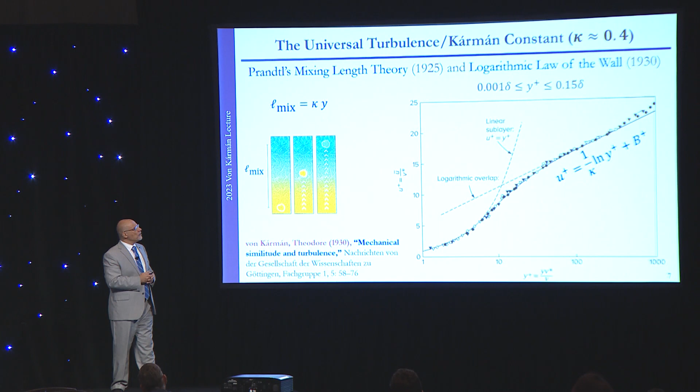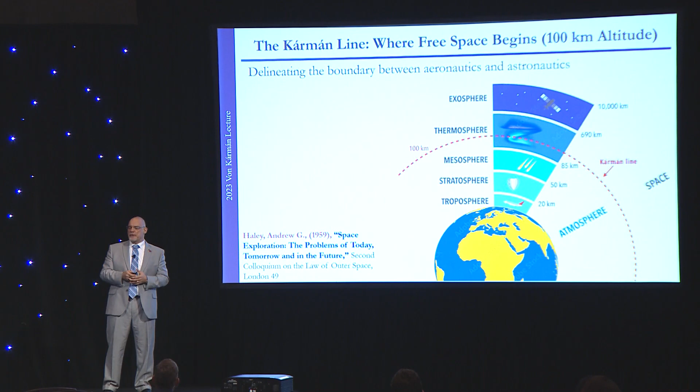Another well-known term that is used is the Kármán line, that is approximately about 100 kilometers, which delineates the beginning of free space or outer space, so the edge of the atmosphere, that is also named after Dr. von Kármán. Now, however, of all the publications that Dr. von Kármán had, if we do a search on the Web of Science, by far his most widely cited publication is his work on the momentum integral approach. That was a 1921 paper.

We on the board of the American Institute of Physics, and particularly Physics of Fluids, had a special collection to commemorate that study a couple of years ago, and we received a number of contributions all the way from Ohio State University to Stanford, showing that this approach is still being used today. And of course, the momentum integral approach is taught globally. You can find it in almost every textbook on fluid mechanics, both at the undergraduate and graduate level. I personally covered the entire theory last week at Auburn University in my Aero 3 course, which is on viscous aerodynamics.

Every senior has to take that at Auburn. But to put it in context, we have to go back through time to 1904 with Ludwig Prandtl and his seminal paper. It was only an 8-page paper, yet many considered it to be revolutionary in the sense that it laid out the framework for everything else to come.

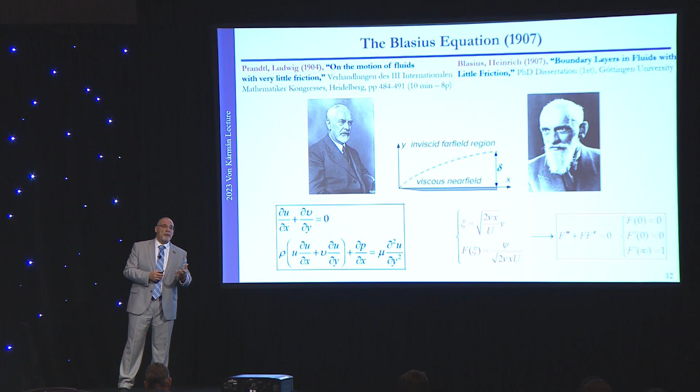It has been also used as a benchmark for both analytical results and in terms of testing new computational methods that seek to solve nonlinear problems. Now, let's talk about the 1921 paper, whose centennial we would like to celebrate today. It was published in the Journal of Applied Mathematics and Mechanics, ZAMM. That was at the time one of the most prestigious journals in the world. That's where von Mises published the laws of stresses.

And this paper really gave us a simple formulation for the shear stress connected to both capital U and little u. Capital U referred to the far field, and up to that point everyone knew how to capture the far field, and little u referred to the near field. That was the velocity profile within the thin viscous boundary layer that Prandtl had talked about a few years earlier. And it came as a response to the Blasius solution.

The Blasius solution was fantastic. It's referred to as an exact numerical transformation or reduction of the Navier-Stokes equations, but it's limited to flow over a flat plate, whereas the momentum integral formulation by von Kármán applied to both laminar and turbulent flows, and truly could be extended to arbitrary configurations. So it had no limitations such as those applied to the Blasius model.

And again, in order to solve it, one needs to know the far field, which was generally very well known, and also the near field, little u. And for that reason, Kármán's companion Pohlhausen, who had moved with him to TU Aachen, published a sequel. They were published back to back in ZAMM, in which he provided polynomial approximations that helped us to capture and model the velocity profile within that thin viscous boundary layer.

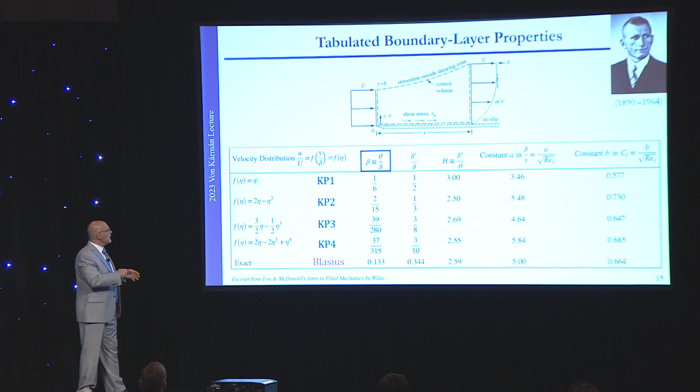Next, I'm going to look at how it's usually presented in various textbooks. This is a table taken from Fox and McDonald's Introduction to Fluid Mechanics, widely used. I did not want to use one from Frank White's book that I helped co-author. But this is one, actually, when I was a student, I ended up studying through using this table. And you notice here on one hand, we have the different polynomials, first all the way to fourth order, and the different constants that we look for.

Beta, for example, is the normalized momentum thickness. It's a very important parameter. It's a number that you can calculate for any given velocity profile. You can find beta. Also, we have a constant that we're going to refer to as A. This is really a constant that characterizes the boundary layer thickness. If we know A, we know the boundary layer thickness because there is a universal form for it, and that varies, of course. And there is another constant B, which gives us the skin friction coefficient.

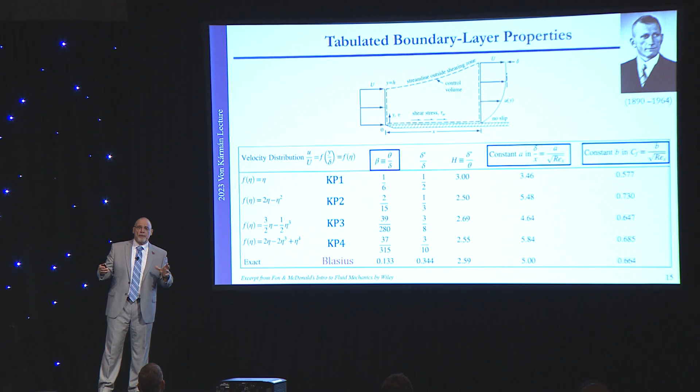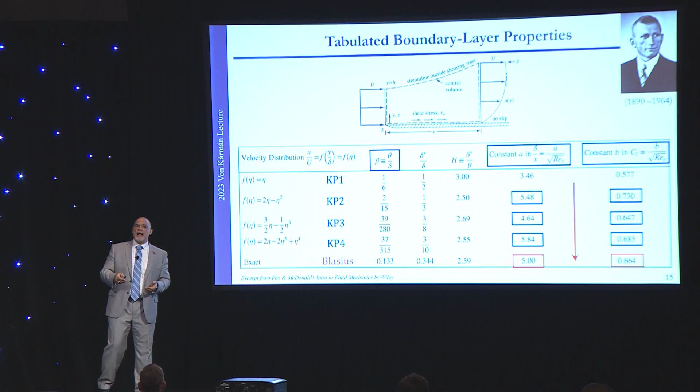Now, there are many other parameters, but I want to limit my discussion to only two because we have a limited time to cover here today. And one thing that was noted as we moved from the second order to the fourth order, the discrepancy between those values that we obtain and those predicted by the exact solution, the supposedly most accurate solution named after Blasius, actually the error increased. To show this more dramatically, I calculated the relative errors using any one of these polynomials, and let's take a look.

So as we move from the second order polynomial to the fourth order polynomial, the error increases from about 3% to 13%, and most significantly in modeling the boundary layer thickness, the error using the supposedly most accurate polynomial, the fourth order polynomial, becomes of the order of 17%, which for many of us is considered to be unacceptable. As a result, many have abandoned the use of the momentum integral approach, the Kármán-Pohlhausen, and adopted other techniques such as Walz and Thwaites that are also taught globally.

This problem really bothered me for many years. I've been in academia teaching for perhaps more than 30 years, and I've asked every faculty I've come across who teaches the subject from MIT to Stanford why this happens, and the only answer I would get, hey, this is part of the beauty of aerodynamics and fluid mechanics. They are full of paradoxes. But it really bothered me that when we go to a higher order polynomial that is supposed to capture more correct boundary conditions, the ability of that polynomial to agree with the exact solution deteriorates. That did not make sense to me, so I decided to investigate this.

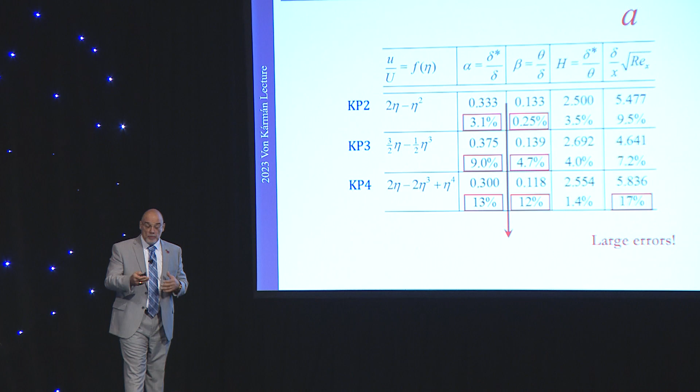And by the way, in order to find any one of these constants, A and B, for any given profile, one has to go through a set of algebraic operations, and these take a bit of time and effort. But throughout this type of effort, one can attempt to generalize. And the way I was able to reverse engineer this problem really happened while preparing for classes. I was able to come up with two constants, A and B. These are the same two constants we talked about, one being the boundary layer thickness, one being the skin friction coefficient, and find direct connections between the vorticity at the wall, which is also the slope of the polynomial, f naught prime, beta, which is the momentum thickness normalized, and A and B.

Those relations were so simple. If you multiply A and B, you get 2 f naught prime. If you divide B by A, you get beta. And then knowing how to connect the final answer all the way to the polynomial itself from its roots, it allowed me to reverse engineer the problem, and essentially take a deep dive into it and understand why different polynomials do not agree with the exact predictions. And to show this more clearly, I'm going to have some visuals.

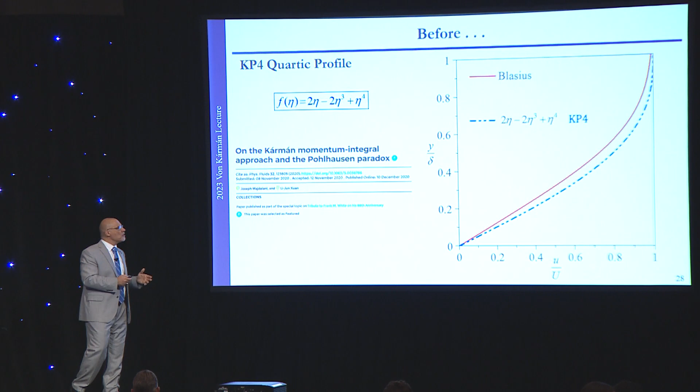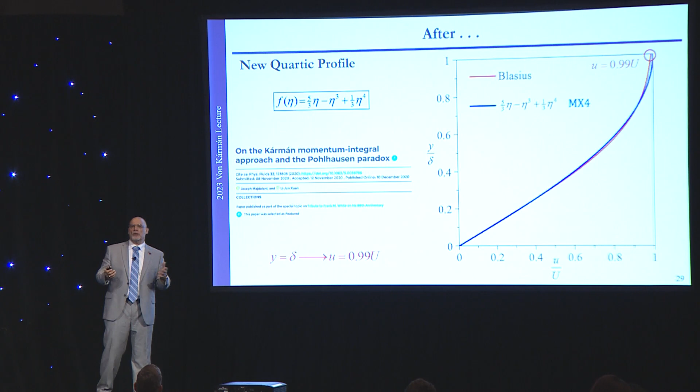Now one question here from the audience would be, well, why is there a discrepancy at the top, right here at the corner? Well, that is not in our hands. That's because the Blasius model uses Prandtl's strict definition of the boundary layer edge, which is at 99% of capital U. If you remember, at y equal delta, little u is 99% of capital U, whereas Pohlhausen postulated little u equal capital U, and we tried to compare apples to apples, so we remained consistent with Pohlhausen's postulates through and through, except for the one compatibility condition that we discovered is incompatible with the solution, should be relaxed, and then the polynomials will continue to improve in accuracy.

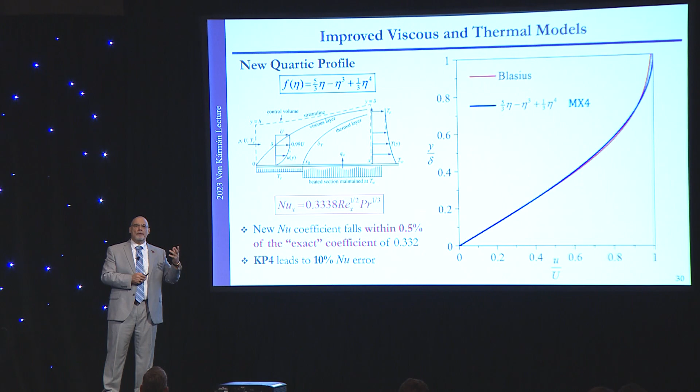Now, we applied it to the modeling of a heated plate that's maintained at a constant wall temperature, and we were able to recover the exact coefficient of the Nusselt number within an error of less than 0.5%. All other models had errors exceeding 10%. So we're really happy about that. But we did not stop there. Having discovered the tools to reverse engineer this problem, we went ahead and found a virtually exact analytical solution to the Blasius equation, which is taught numerically all over the world. Now we have a single solution. We don't need to solve that numerically anymore.

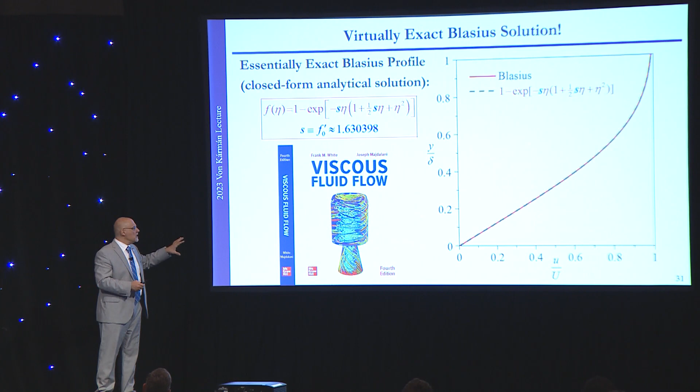We have a single expression shown here that is basically indiscernible from the Blasius solution. And it is not a curve fit. It is derived from first principles by applying the correct boundary conditions. So I'm really happy about that. And all the work that I've discussed here, if you want to get into the details of those, they are found in the 4th edition of Viscous Fluid Flow.

So we also applied it to flow past a cylinder where there's a pressure gradient and variation. We also were able to get very good results for predicting the separation point and the skin friction coefficient. We got excellent results compared to numerical and experimental data.

Now, again, the momentum integral approach lives on, but also it is empowering several other tools that are used worldwide today. One of them is FlightStream. This was introduced in 2012 by my colleague, Dr. Roy Hartfield at Auburn University, and his doctoral student, Dr. Vivek Ahuja. It's now really grown substantially. It is based on a surface vorticity solver. It's a panel code that uses surface meshes instead of volumetric meshes.

It enables us to obtain quick results for aerodynamic measurements, including fluid-structure interactions, flutter, flapping, morphing, etc., with very short turnaround times. It's very robust, it's high fidelity, it's ideally suited for early stages of design, when we are in the conceptual design phase. It's been mostly supported by NASA and the Air Force, and a couple of years ago, NASA featured it amongst the most promising new technologies that came out of their SBIR, STTR program.

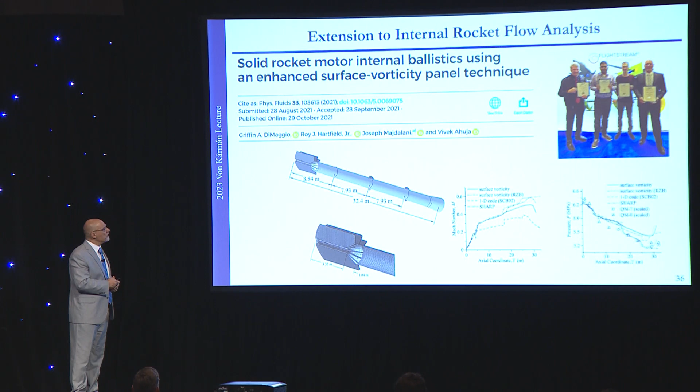Okay, so the last segment of my talk will focus on cyclonic rocket engines. This has been my passion for the last 30 years, and this is one that my team takes great pride in. So just a bit about our team. We have been focusing mostly on advanced propulsion concepts, advanced configurations. Our goal is to improve the performance and the safety of large combustors such as thrusters, rockets, etc., by leveraging the beneficial effects of swirl dynamics and stable combustion.

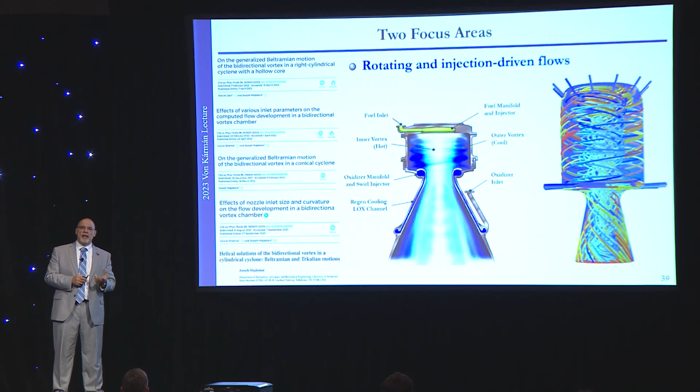So our two areas of focus are rotating and injection-driven flows, especially cyclonic flows, and also acoustic instabilities and wave propagation. Our partnership with Orbitec back then, which is Sierra today, goes back to 95, 96. In 96, Bill Knuth, the chief engineer who came up with the first vortex engine concept, asked me to take over at the time and help in completing the proposal on the VIHRE engine, the vortex injection hybrid rocket engine. This is an engine that was very neat.

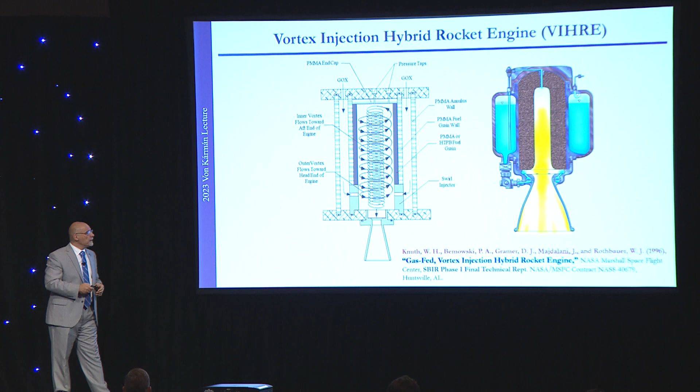It was funded by NASA Marshall at the time, and we developed a model for it, it was built, and it was fired. It led to a 7-fold increase in regression rates for hybrid rockets compared to the classical hybrids. Basically, it leveraged the motion of a cyclonic flow field inside a cylindrical grain. And we also looked after that at several cyclonic engine concepts, including the vortex combustion cold wall chamber, the Vision engine, and the VR35K, which is the flagship of Sierra today, the one capable of 35,000 pounds or 155 kilonewtons of thrust. All of those are cyclonic engines, and our team has carried out the bulk of computational and analytical studies that supported the developments of these engines.

This is an example of the VCCW. I need to say a few words about that. So the engine has tangential injectors at the bottom. Unlike any conventional liquid rocket engine, the injection of the oxidizer takes place at the bottom, just upstream of the nozzle, through several injectors. In this case, I'm showing 8. The oxidizer that boils off at a very low temperature, for example, oxygen boils off at 90 K, is injected tangentially to the inner circumference.

It swirls around, travels up the chamber walls, and then at the top, it mixes with the fuel that is injected radially, combusts, and then courses its way out of the nozzle. Now, being at a low temperature, it acts as a film coolant. It creates a thermal barrier that protects the walls from the combustion products, thus preventing the combustion products from accessing the walls.

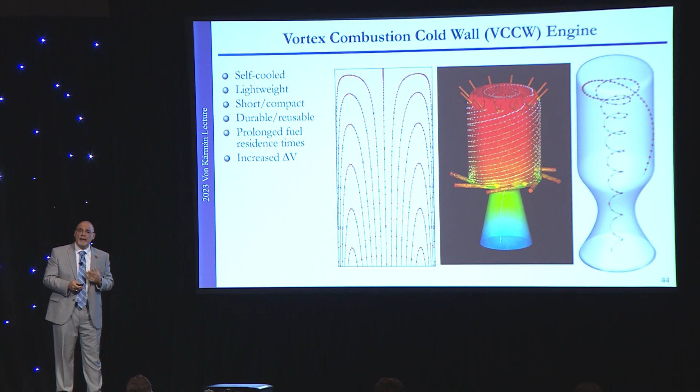So the reduced thermal loading is wonderful to have. The engine does not need cooling jackets. As a result, one can use a lighter weight engine, one that is shorter, more compact, and as we are going to see later on, it turns out to be also more stable than traditional engines by virtue of the swirling flow field in it. It's an engine that we've spent many years studying, and I have a lot of results to share with you.

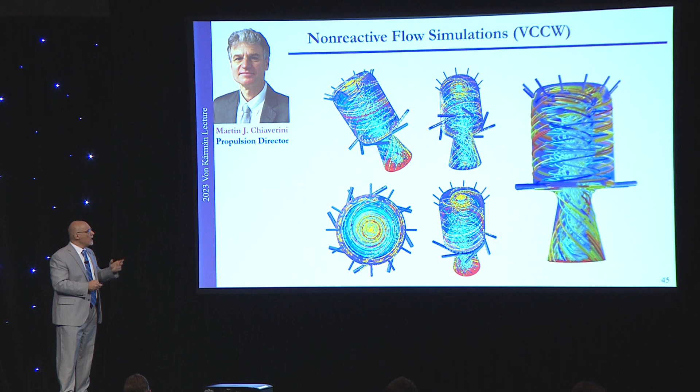So this was sponsored by Dr. Marty Chiaverini, who's the current director of propulsion at Sierra Space. We've done the cold flow simulations. We've also carried out the reactive hot flow simulations for hydrogen-oxygen, propane-oxygen. We've done methane-oxygen, different combinations of propellants, hydrogen peroxide, and RP1.

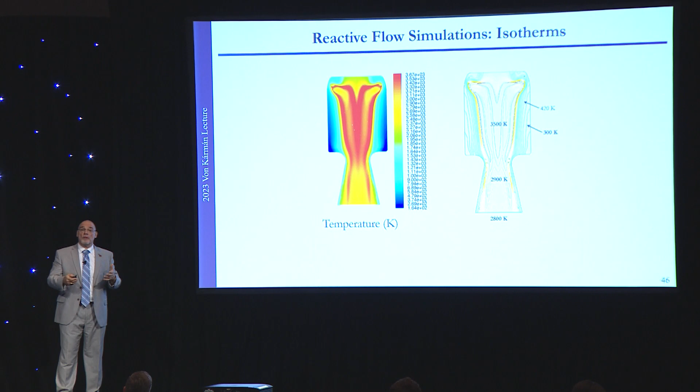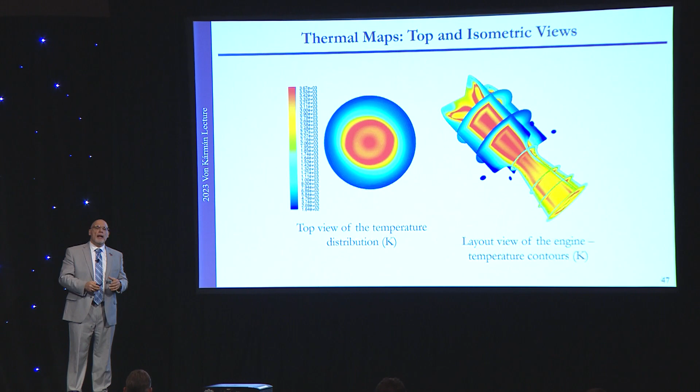And you notice here that the temperatures are pretty high in the core region, yet the walls remain at a relatively low acceptable temperature, again, which reduces the thermal loading on the walls of that Vortex engine, making it very unique in performance. This is a top view and isometric view, just kind of more showing that we are able to demonstrate the proof of concept that the chamber is cool across the length of the chamber.

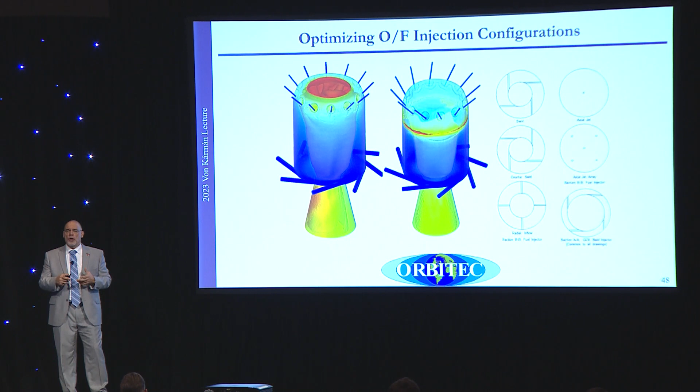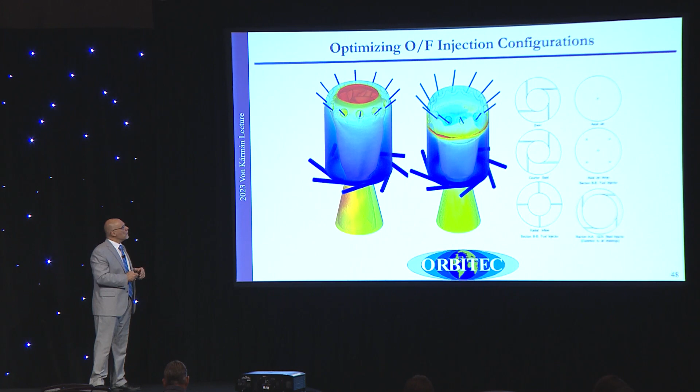And we also looked at various different configurations for injectors. We looked at co-swirling, counter-swirling. We looked at radial injectors, slanted injectors, axial injectors to try to eliminate those configurations leading to hotspots and those that actually are optimal. And in this process, we continue to analyze the problem. Now, the cooling effect, the fact that it's self-cooled, has been well established and celebrated in various magazines, including the December issue, the year-end review of Aerospace America, and Space-Time magazine, and many others.

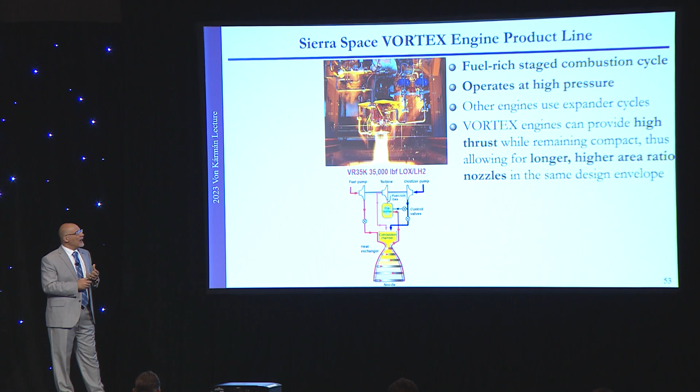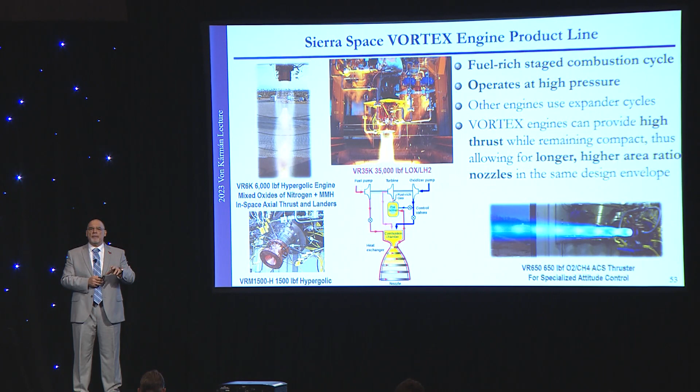The advantage that it offers compared to other engines out there that use the expander cycle is it can allow for a much longer nozzle that provides for a larger expansion area within the same installation envelope. So it's a fantastic engine to consider, and it's very stable based on our studies. And there are many other vortex engines that Sierra is developing for the lunar lander and so on. The RCS thrusters, as you saw in the video, are responsible for docking with the space station, for landing, for orbital maneuvering, and also for re-entry.

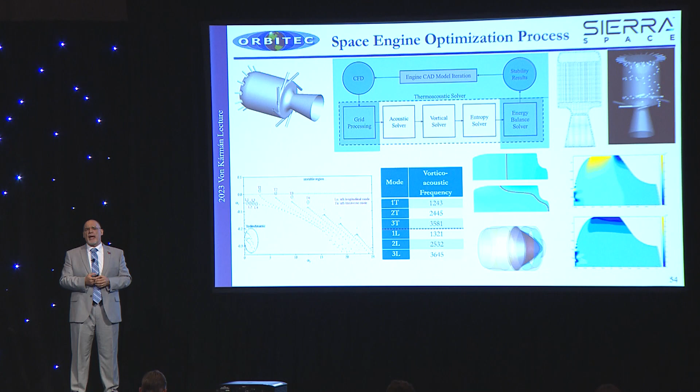And in our analysis, we do not only provide the full computational analysis, the CFD, to characterize the flow field within the engine. We also look at acoustic instability characteristics. We try to identify all the critical frequencies and stability acoustic signatures in any engine that we study. And what we discovered is that for the class of cyclonic engines, the higher the speed, the more stable they get, which is almost counterintuitive at first. But the best analogy I can give you is that of a top.

When you spin a top, the higher the spin that you give to it, the more stable it's going to be. And this is our observation, and we're able to prove that mathematically, as did von Kármán back in the days with the von Kármán street. So the higher the injection speed, the tangential injection speed, the more axisymmetric the flow field gets, more coherent and more stable. I left the best for last.

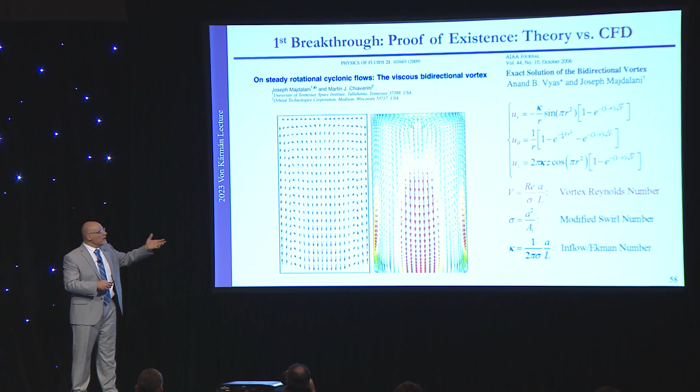In our analytical studies of cyclonic engine, we started really with nothing. There was nothing out there to model the wall-bounded cyclonic flow, and yet we, using, again, von Kármán's ideas of space reduction and matched asymptotic expansions, were able to first come up with an exact solution for a flow inside a cylindrical chamber that was identical to the CFD results, uncovering the key characteristic parameters such as the vortex Reynolds number, the Ekman number, the modified swirl number, directly from the governing equations, and also following Kármán's lead of going from the specific to the general.

We went from simple models to a general model that enabled us to capture any type of injection or outlet profile. And we uncovered a suite of very beautiful, elegant helical profiles that fall under the Beltramian, Trkalian, and complex lamellar classifications. And those enabled us, again, to uncover a set of fundamental characteristics that help us better understand the physics of the problem, the maximum tangential speed, the rotating forced vortex near the core of the chamber, which turns into solid body rotation. All of those parameters we were able to extract analytically.

And one of the key characteristics when you talk about tornadoes or hurricanes or cyclones is something that is defined as the mantle. This is a rotating, non-translating cylindrical interface that separates the outer vortex or the updraft from the inner vortex or the downdraft. And we were able to locate that through our models theoretically. One was a cosine that led to a root of 0.707. One was a Bessel that led to a root of 0.628.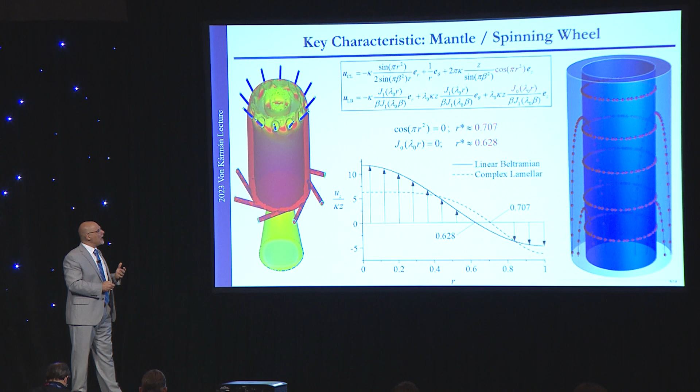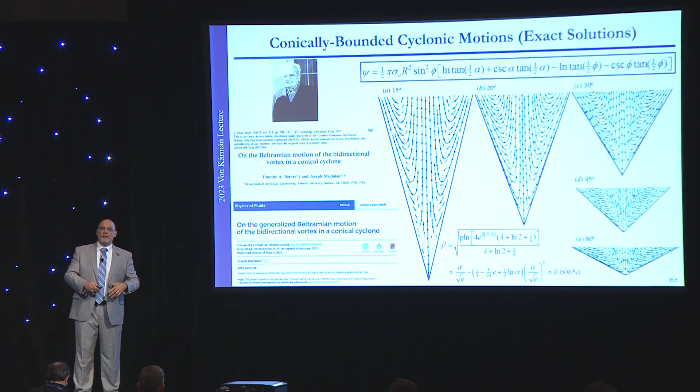And we were very pleasantly surprised to see that even at MIT, Joe L. Smith, who was the department head of mechanical engineering, who had a passion for hydrocyclones, had come across similar values for the mantle location in his hydrocyclones. And lastly, we moved from cylindrical configurations to conical cyclones and also to hemispherical cyclones, finding exact solutions to those problems and adding to our repertoire of engineering approximations that help uncover the physics of these very exciting novel problems.

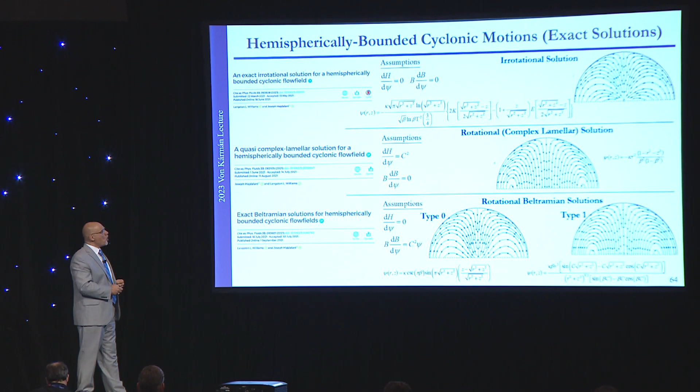Before I close, one of the things we discovered through the analytical models is that along the length of a cyclonic chamber, there is leakage that is possible from the outer vortex to the inner vortex as a result of the cross-flow that exists along the mantle location. And the longer the engine is, the larger the leakage will be. So the oxidizer that's being injected is going to short circuit and leave the chamber before it had the chance to combust. So we started moving towards better, more optimal designs that are shorter and ultimately landed on hemispherical configurations that do not allow any leakage to occur.

Now, again, I cannot tell you about the most recent optimal design because it's highly proprietary, but just want to give you an idea of how the design evolved over time, inspired and guided by those theoretical results that we obtained.

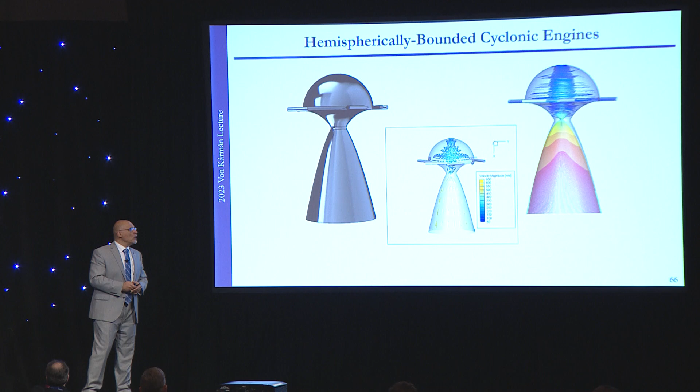So in closing, I want to thank all of you for sticking around as we celebrate von Kármán and his momentum integral formulation, and also celebrate some of the findings we had, the breakthrough in understanding how the Pohlhausen paradox can be resolved and coming up with actual solutions to it. And as a result, really the momentum integral approach that was introduced by von Kármán lives on today. Also, von Kármán's ideas that consist of systematic simplifications of the governing equations while retaining the gist of them enabled us to extract absolutely beautiful solutions to a variety of highly complex three-dimensional problems that helped us to shed light on a number of configurations related to cyclonic engines.

So with that, I want to acknowledge some amazing individuals that I had the pleasure to work with, especially Dr. Kurt Polson, who nominated me for this award. I cannot thank him enough if I were to live 100 times. Also, many colleagues, my references, and Dr. George Lesieutre, who headed the selection committee, and every member of the selection committee. I cannot tell you how honored and humbled I am today to receive this award. And thank you very much.